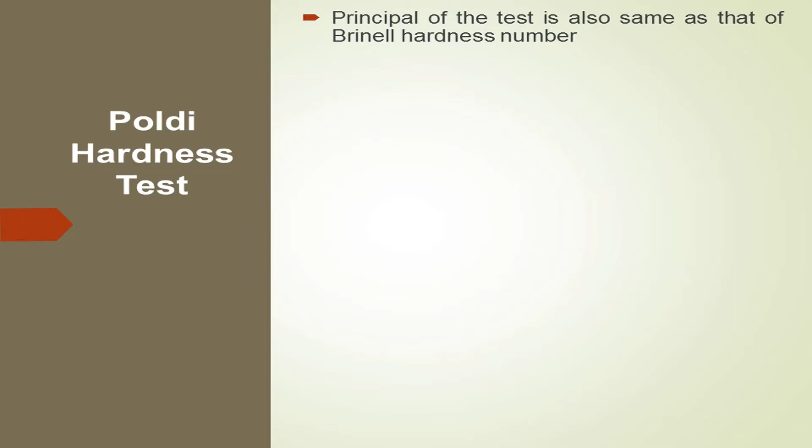The principle of the Poldi hardness test is also same as that of the Brinell hardness number. The Poldi hardness tester is a very small size and portable unit. A hardened steel ball indenter of 10 mm diameter is situated at the bottom, and a striking head at the other end. A standard bar is inserted in a slot provided in the instrument, in touch with the ball indenter. Hardness is known for that bar and is embossed on that bar.

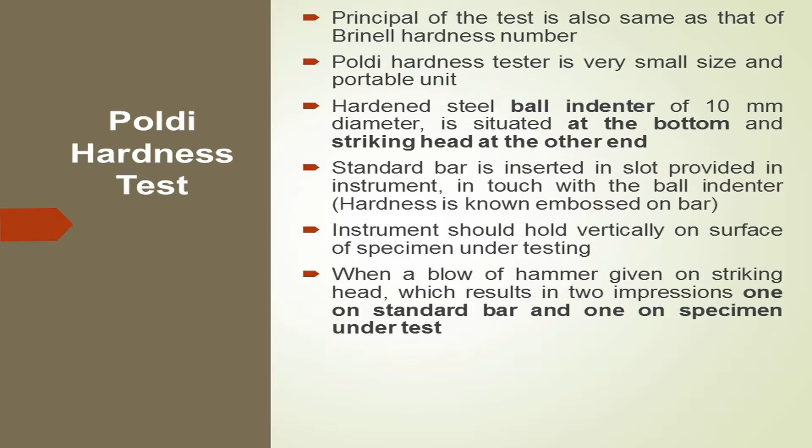The instrument should be held vertically on the surface of the specimen under testing. Then a blow of a hammer is given on the striking head, which results in two impressions, one on the standard bar and one on the specimen under test. The diameter of the impression is measured with the help of a low magnifying glass.

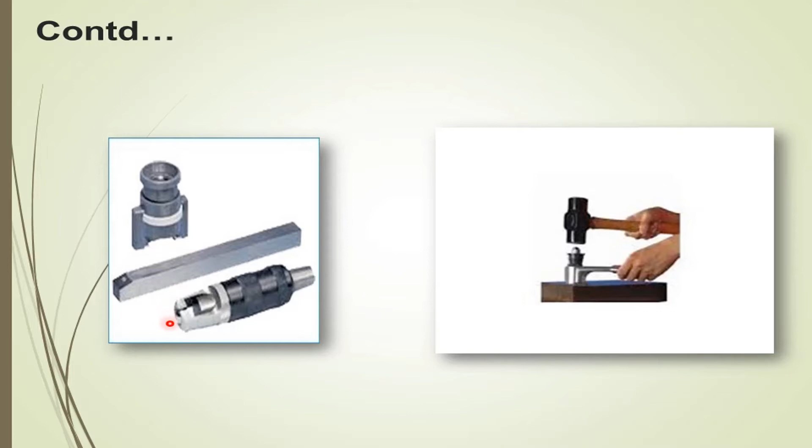So what we have to do basically is insert the standard bar in this slot, and the specimen whose hardness we want to measure is placed under this ball, so that when the blow of the hammer is given, we get two impressions, one on the standard bar and another on the specimen. After that, we have to measure both impressions.

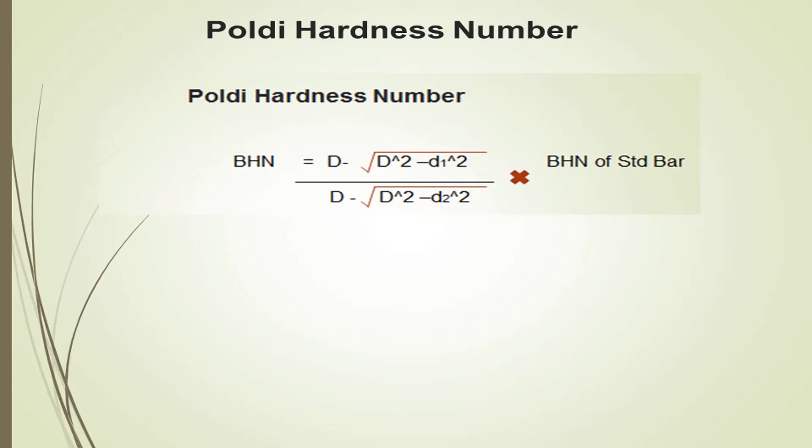For that, capital D is the diameter of the steel ball indenter, which we already know is 10 mm. D1 is the diameter of the impression on the standard bar that we have to measure, and D2 is the diameter of the impression on the specimen under test.

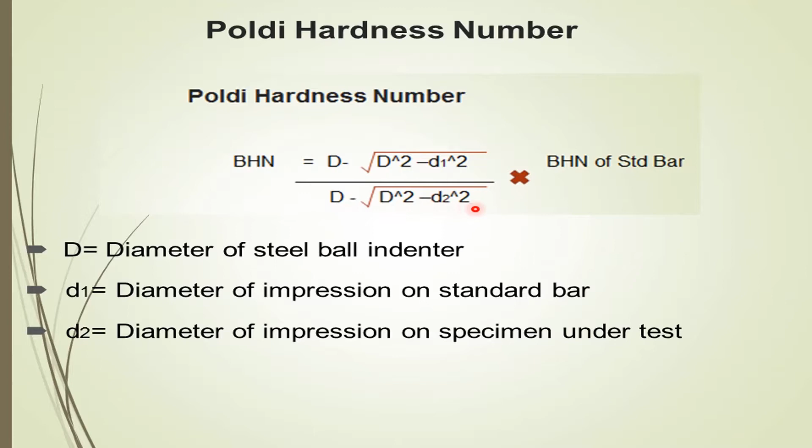According to this formula, BHN equals capital D minus under-root of D square minus D1 square, divided by capital D minus under-root of D square minus D2 square, into the BHN of the standard bar.

So we will see the calculation part. Before going to the calculation part, first we will see the advantages of the Poldi hardness test.

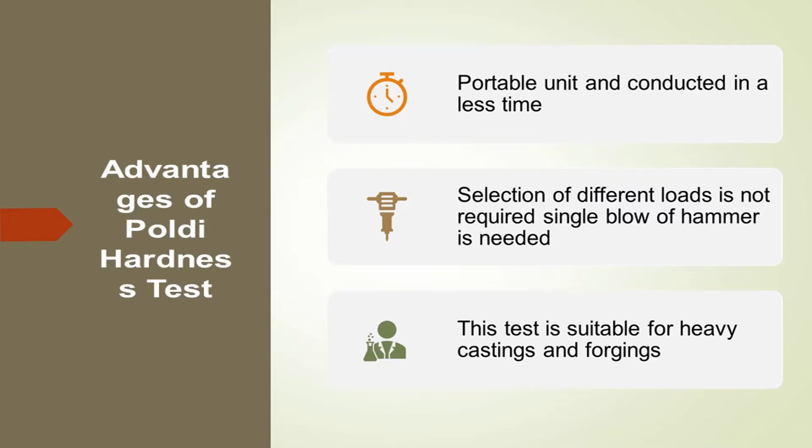This is a portable unit and is conducted in less time. Selection of different loads is not required. A single blow of hammer is needed. This test is suited for heavy casting and forging components.

There are some disadvantages of the Poldi hardness test. The first disadvantage is that the intensity of the blow of the hammer should be proper. Otherwise, if the intensity is too heavy, it will deform the ball indenter, and if too light, the impression will be too small.

The second disadvantage is that it is not as accurate as the Brinell hardness number. The Poldi hardness test gives us the Brinell hardness number, but it is not as accurate compared to the actual Brinell hardness test.

The third disadvantage is that the standard bar needs to be changed as it gets consumed due to the number of impressions on it. So we will now see the demonstration of the Poldi hardness test. Professor Zadu will explain the demonstration, then we will see the calculation part.

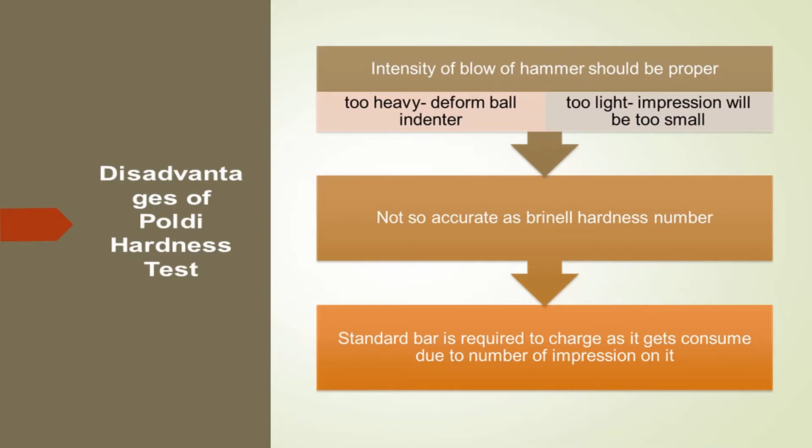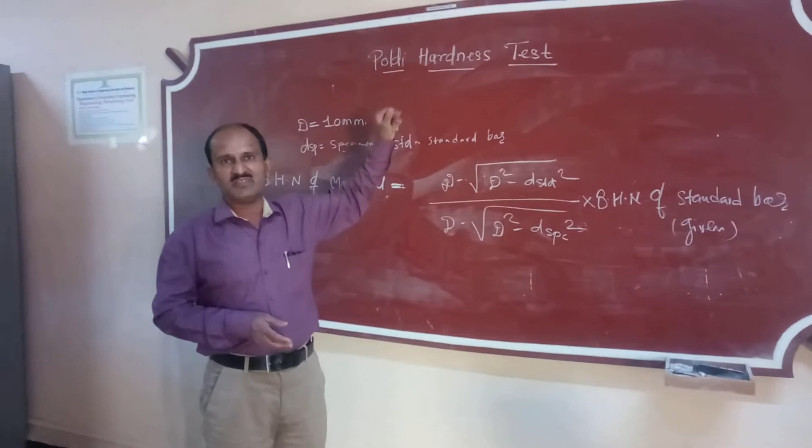Now today we are going to study the Poldi hardness test. Poldi is the name of the scientist or technologist who invented this test, called the Poldi hardness test. This test is recommended to find out the Brinell hardness number of a material.

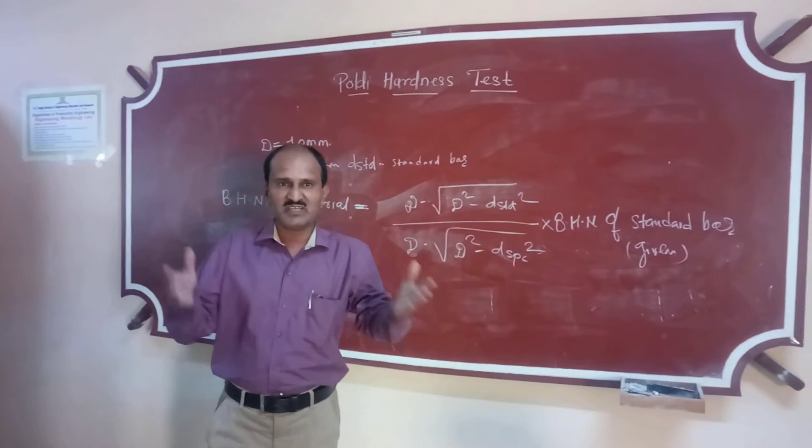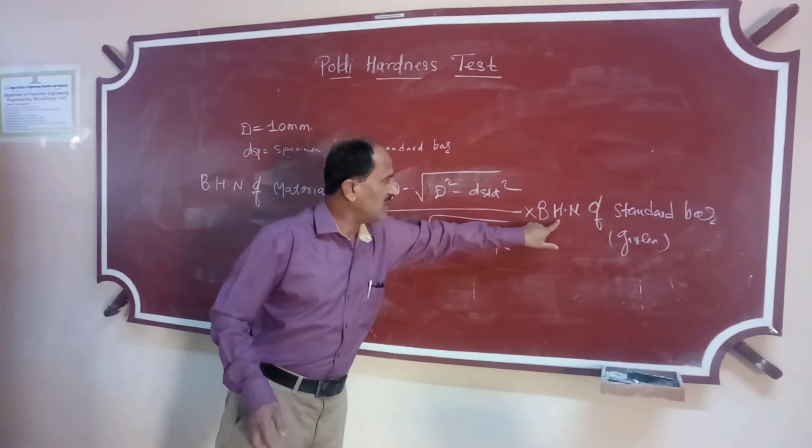As you know, there are notations for hardness number such as BHN, VHN, HRC, HRB. In today's test we will get the BHN of the material, that is the Brinell hardness number, found out using the Poldi instrument.

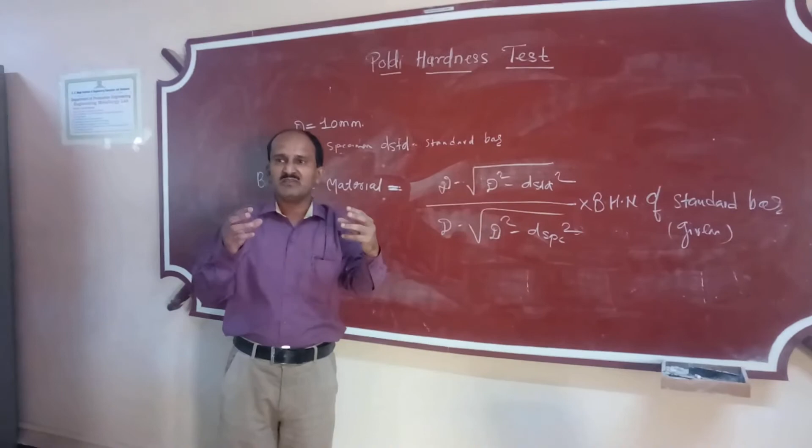The Poldi instrument is very simple in construction. This is the capillary tube with the plunger, and this is the lock for that. The ball indenter for penetration purpose is 10 mm, given as capital D in the formula.

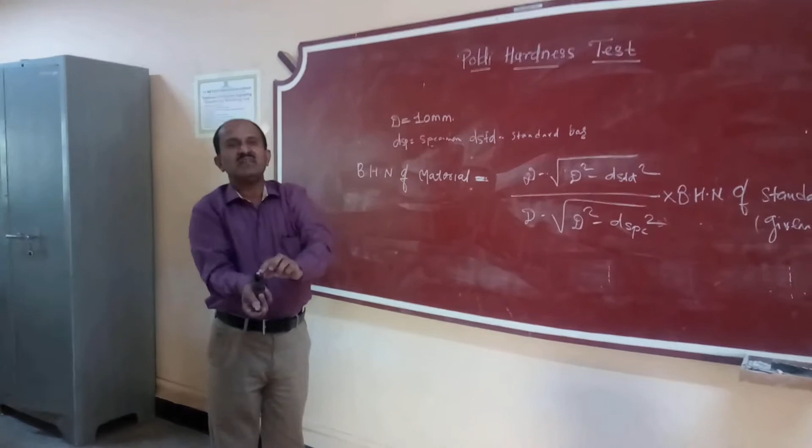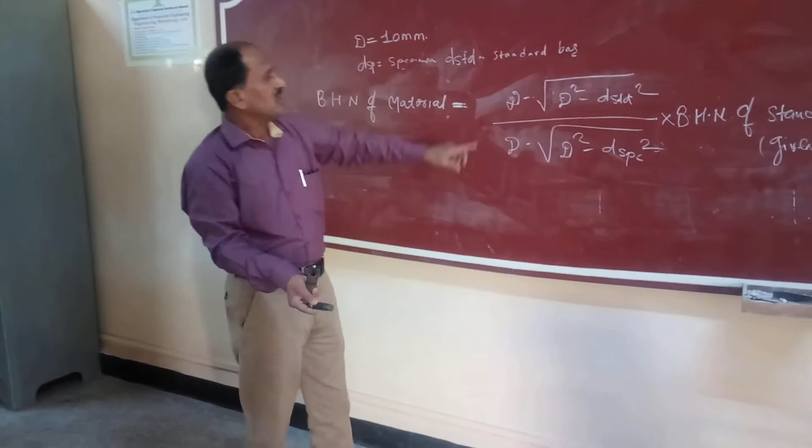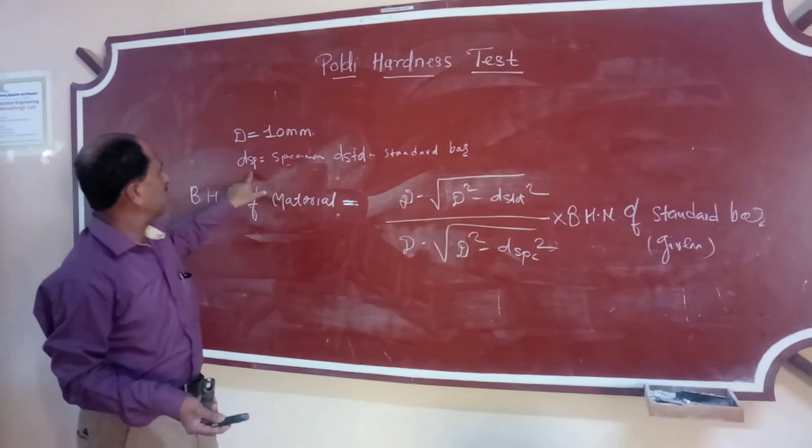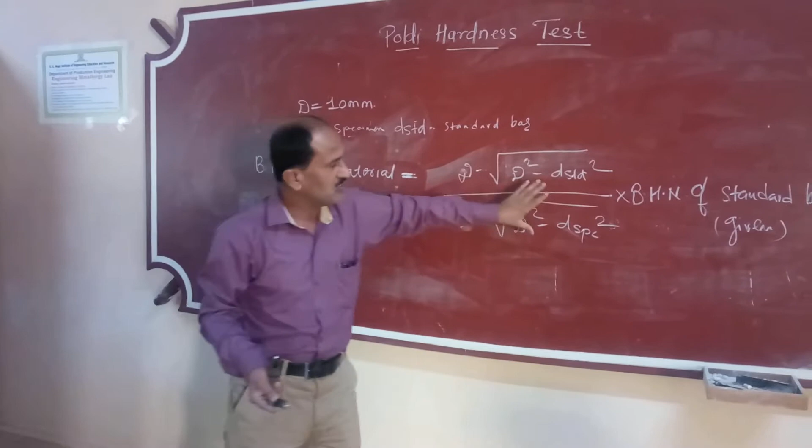We know the formula. Capital D is the diameter of the steel ball indenter. D standard is the indentation on the standard bar after penetration, and D specimen is the indentation on the specimen. I will explain these later. These two values we get after penetration on the material from the circular impression, and by measuring those dimensions and putting the values into this formula, we directly get the BHN number of that material.

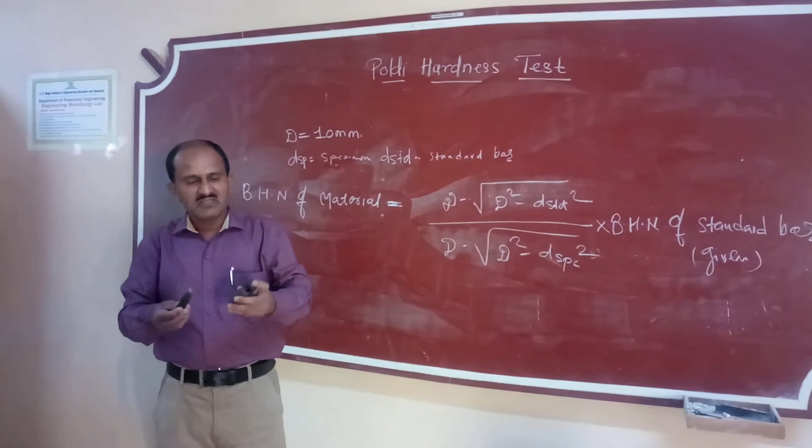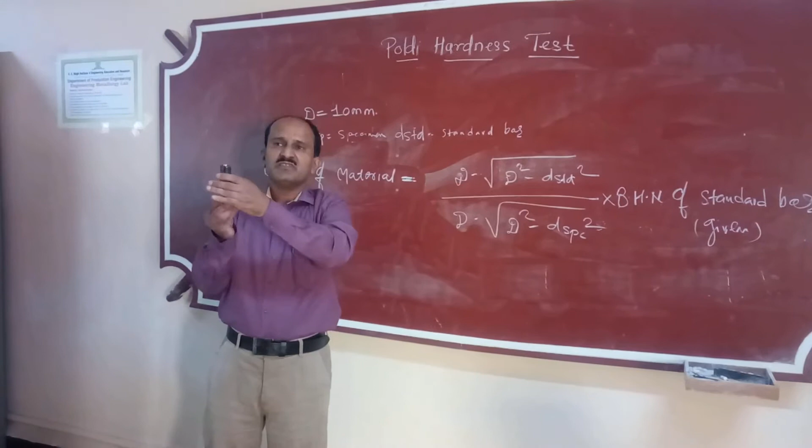It's a very simple test, and the advantage of this test is that the instrument is portable, so you can find the hardness number anywhere, at any junction. If the component is very huge in size and cannot be placed on the anvil of a machine, this simple instrument is recommended for the test.

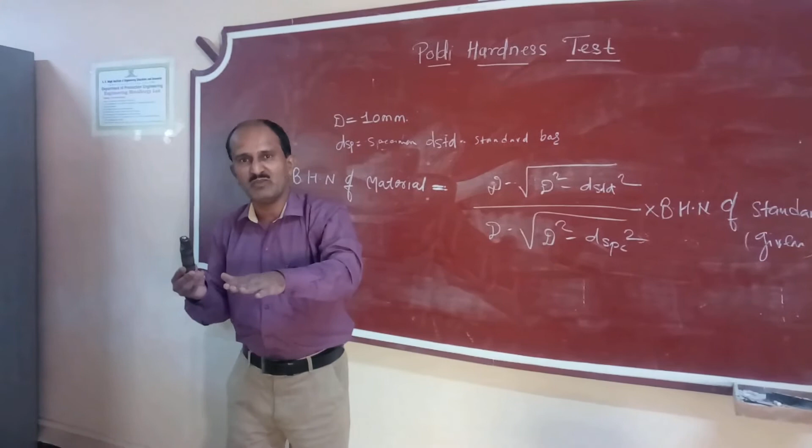Electricity is not required for this test. Only a skilled operator is required, since the intensity of the blow given on the material is very important. This test includes finding the BHN number for materials like brass, aluminium, cast iron, and steel.

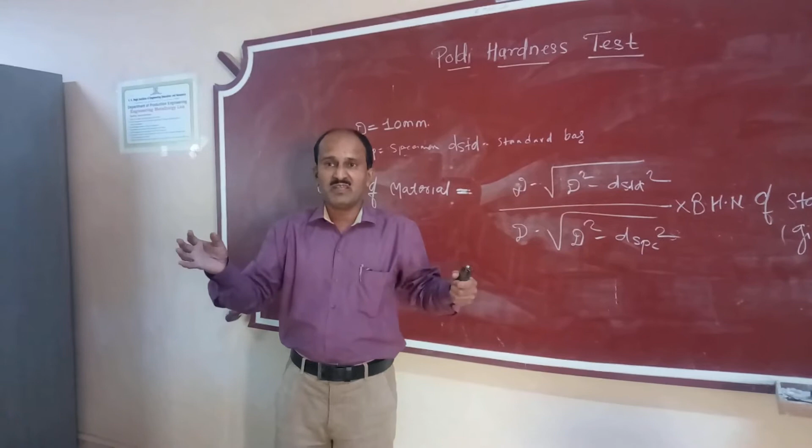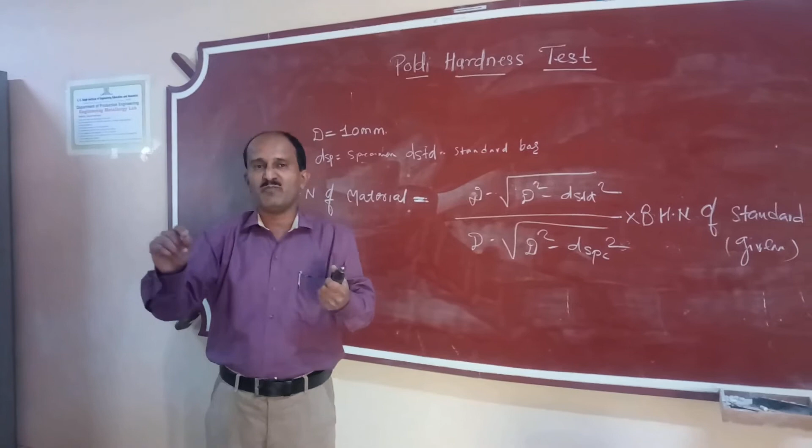Hardened steel material cannot be checked through this test because the hardness number of that material is very high as compared to this ball indenter. So this test is recommended for medium hard and soft material. So how to perform this test?

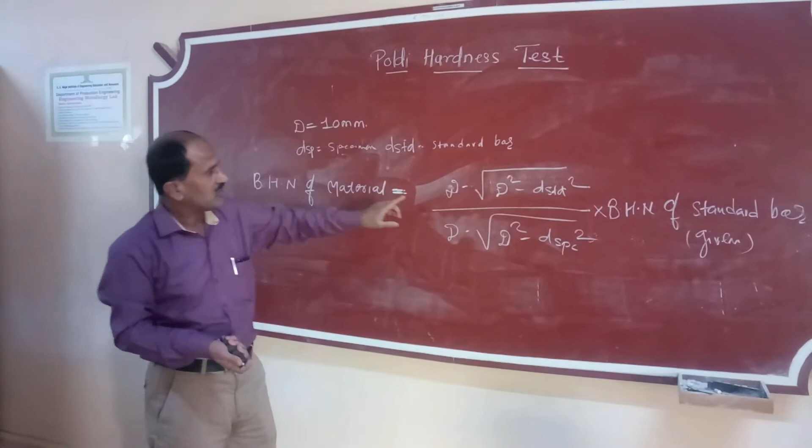We know the formula, we know capital D, it is given. D standard after penetration we will get, D specimen after penetration we will get, so this value we will get after performing this test. But BHN of the standard bar, this value is given. We have to check the number with respect to this standard bar.

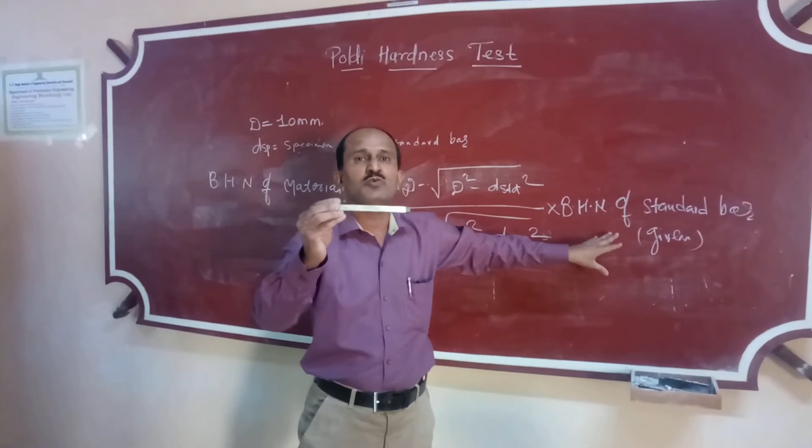So this is steel material, medium carbon steel material, and this is the standard bar which has hardness number 205 BHN. So with respect to all this, we can check aluminum, brass, copper, steel, cast iron material. So this is very important.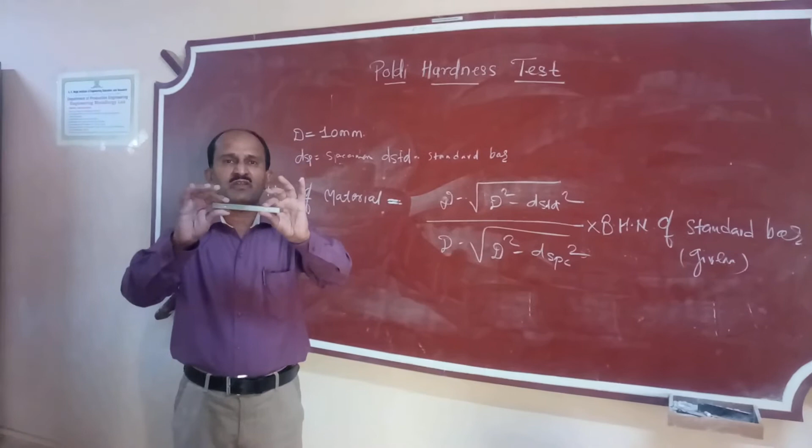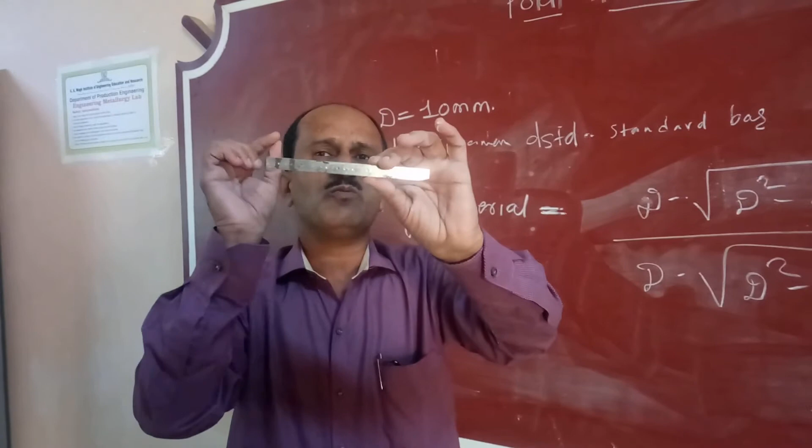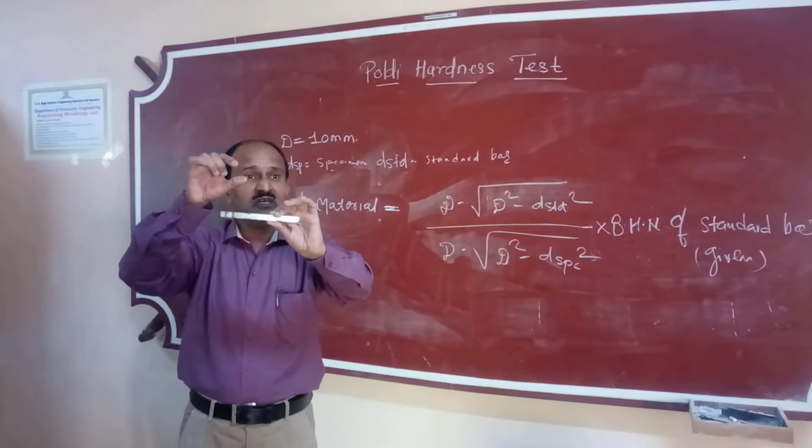After giving the blow on the material, you will get one impression. You will observe this small impression on this standard bar, a very circular small impression. That impression forms after giving the blow on the material; simultaneously it will appear on the standard bar. So we have to observe this circular impression through this magnifying scope.

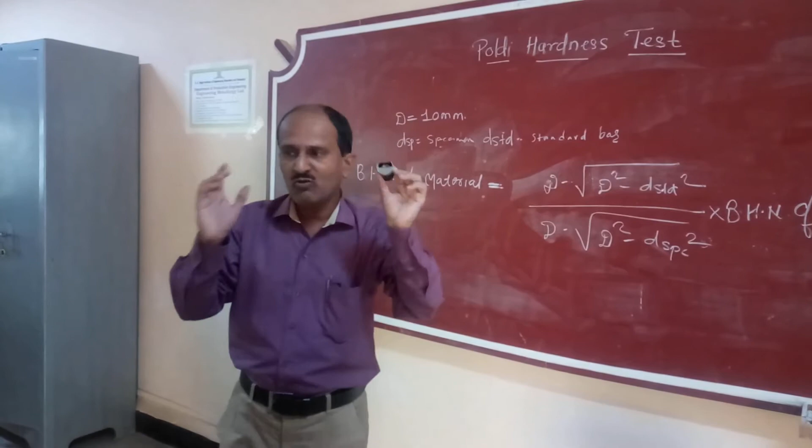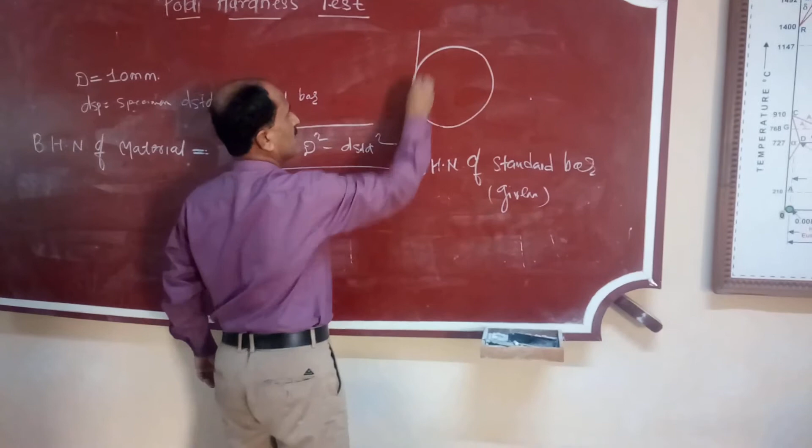See, this is the magnifying scope. With the help of this magnificoscope, we are able to find out the diameter of the indentation or impression. So how do we find this out? On that magnifying scope screen, this type of scale is provided.

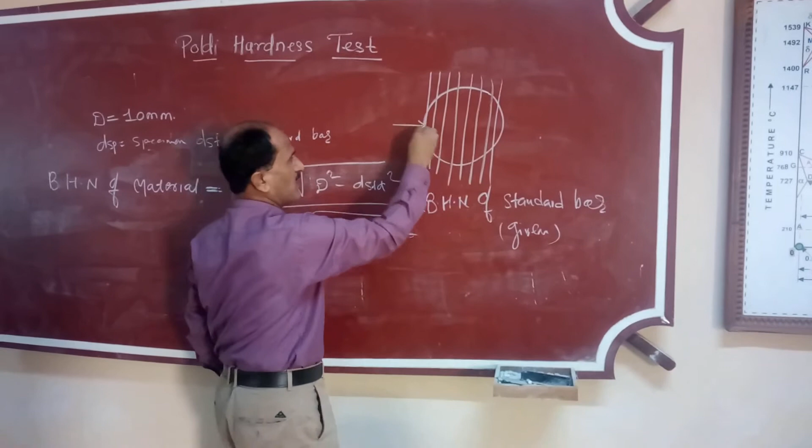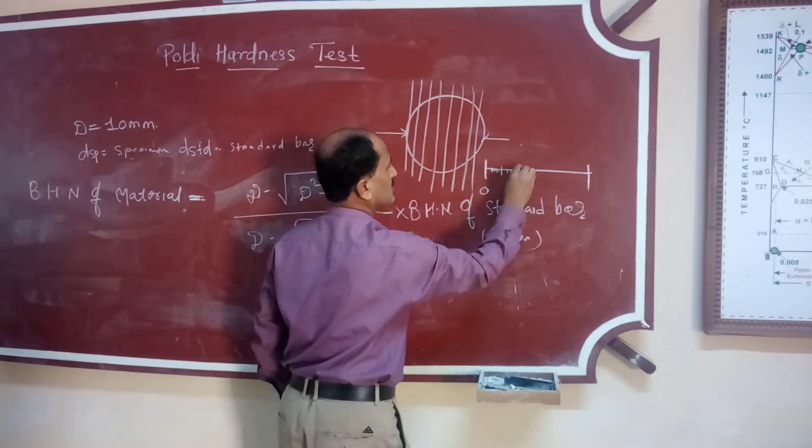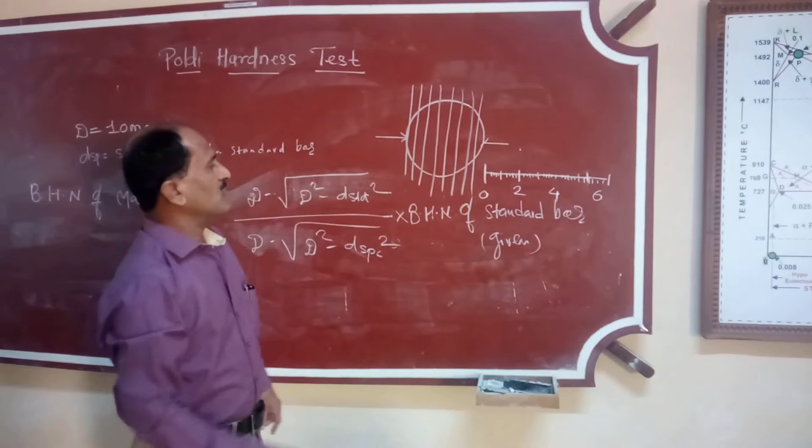The scale will be like this: 0, 2, 4, 6, like this. This value is not displayed on screen, but this is 1, this is 3, this is 5. We have to take care of this scale.

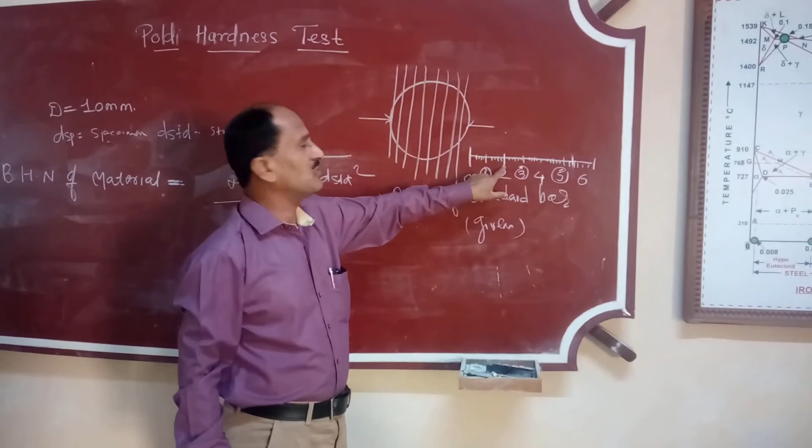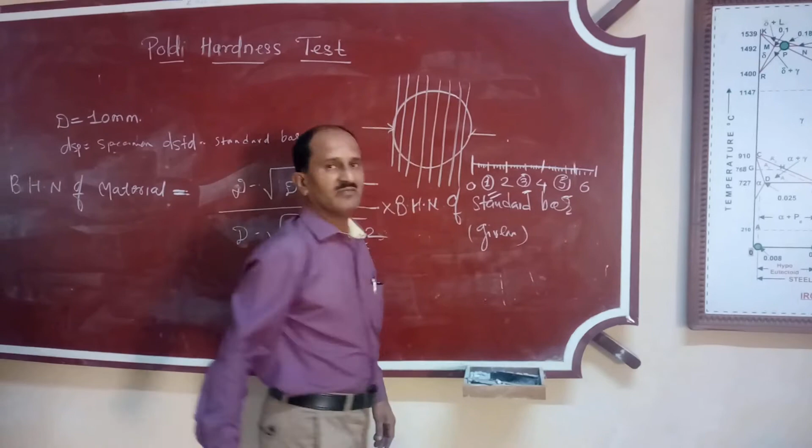So after 0 we directly get 2, after 2 we directly get 4, and after 4 directly 6. But on this scale we have to consider 1, 3, 5 like this. So how to measure this distance, that is very important. For this test, a skilled operator is required. So how to measure?

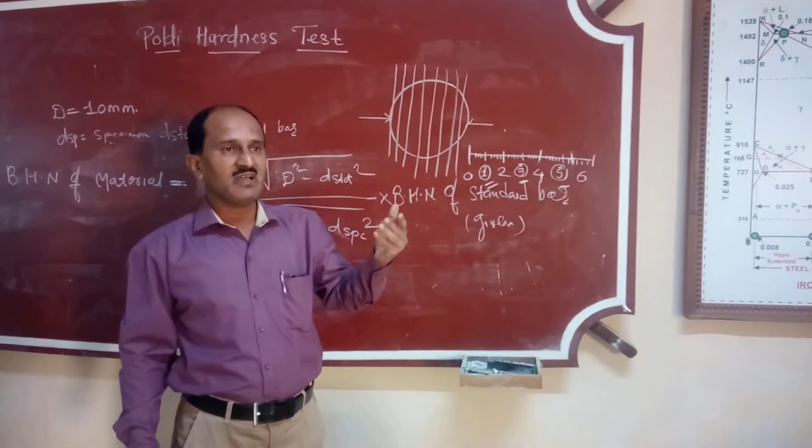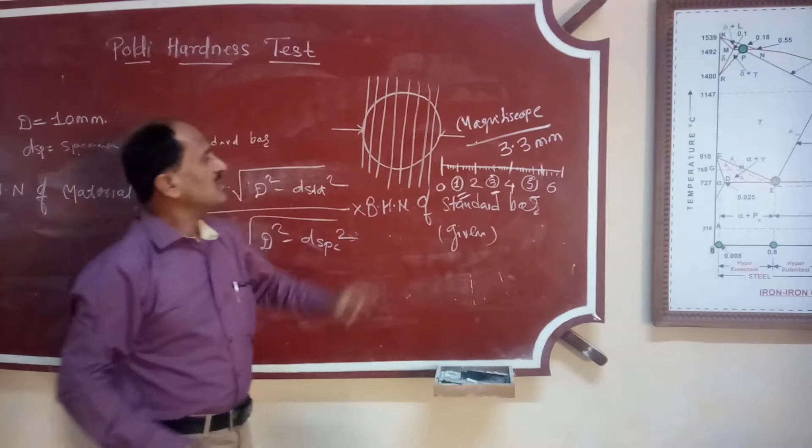We have to magnify the image. So this is the magniscope. It will enlarge this impression and we will get the impression on it. For example, we are getting 3.3 mm distance on this scale. So how will it come? If we have to measure this diameter, we have to set the zero at this junction.

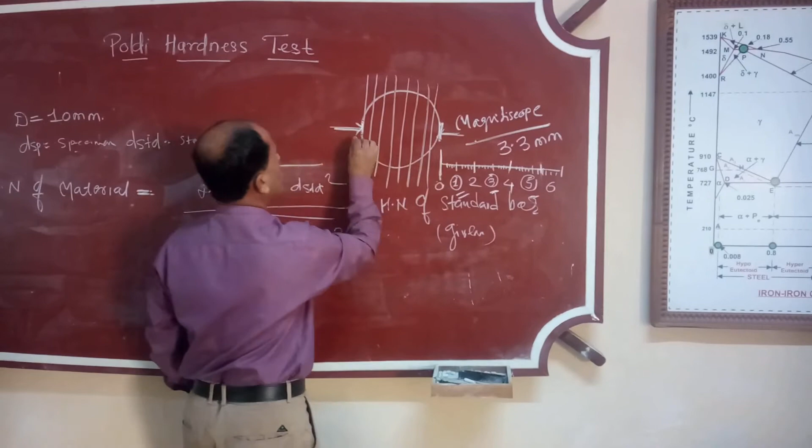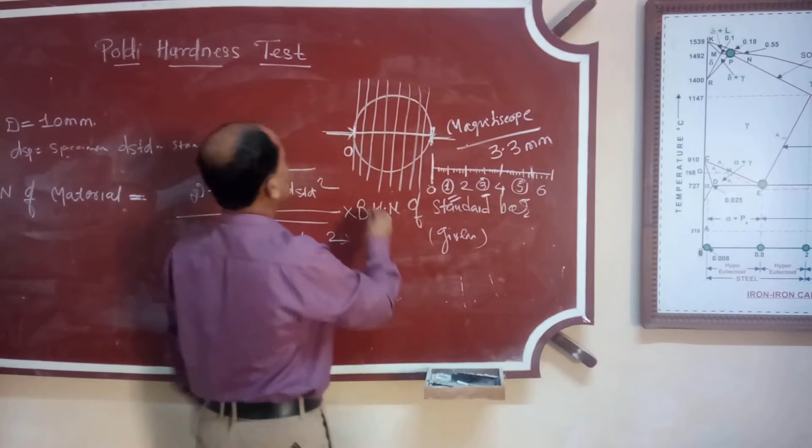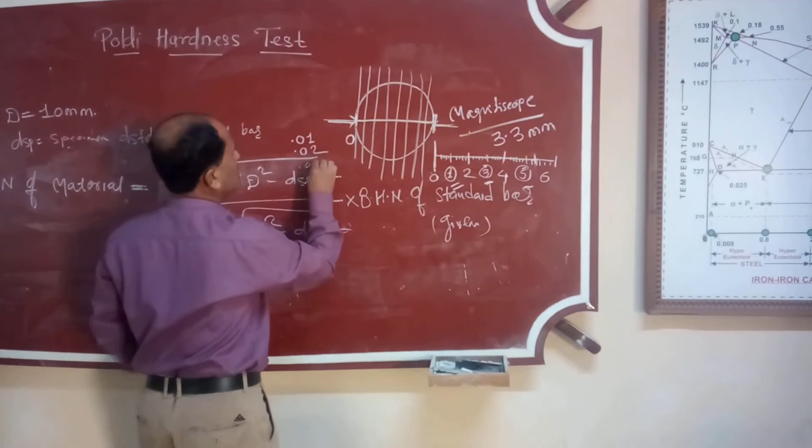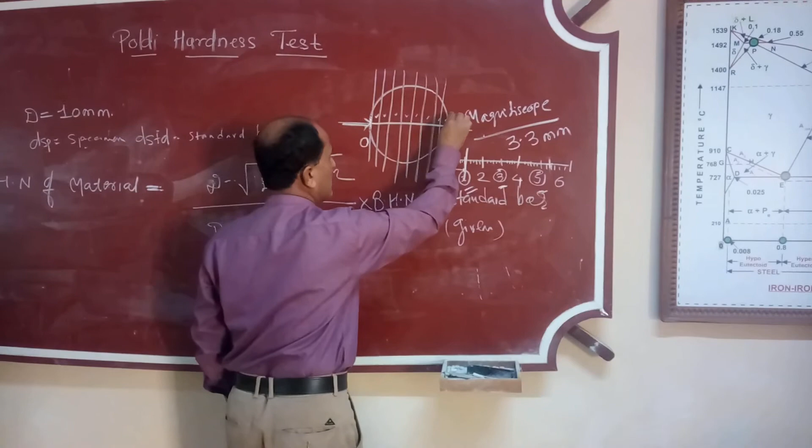Adjust in such a way to see how much distance is occupied by that division. So the distance between two lines, that is very important. Like here .01, .02, .03 like this. 10 divisions, that is 1 mm. When this is complete, these are 10 divisions, 1 2 3 4 5 6 7 8 9 10, it came up to here, so it means that is 1 mm.

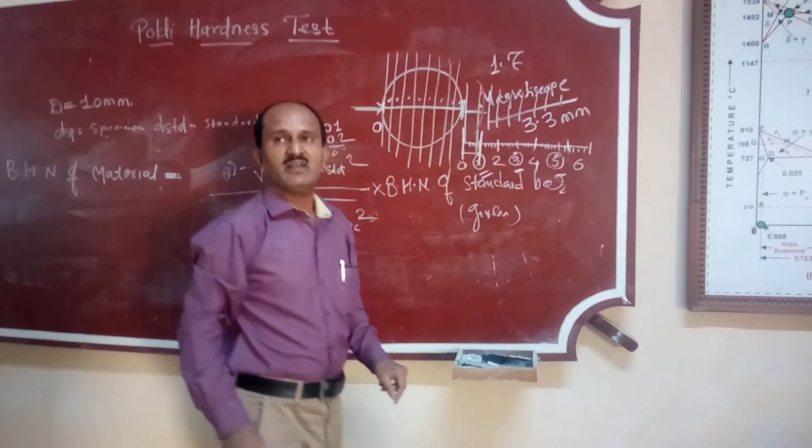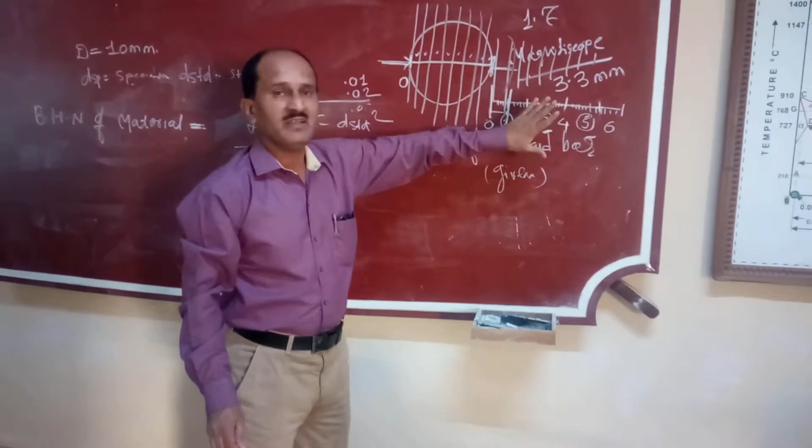It tells that if the distance is 1.7, then after that 1 2 3 4 5 6 7 will be added. So that is very important. Without this, we cannot achieve the reading. So this is a very important factor.

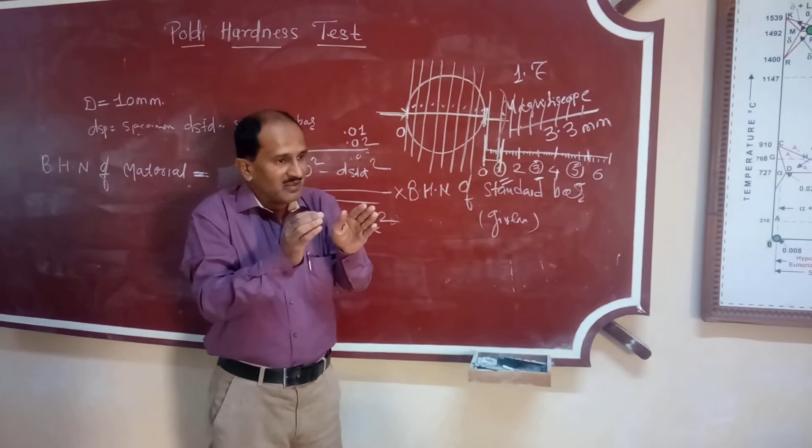As for the measurement, if the measurement differs from the correct reading, it means that the value will not be correct. So we have to adjust the scale along with this impression, that is very important. So the scale is very important. We have to magnify the scale with respect to the diameter portion of that material. Then we are able to find out the correct reading.

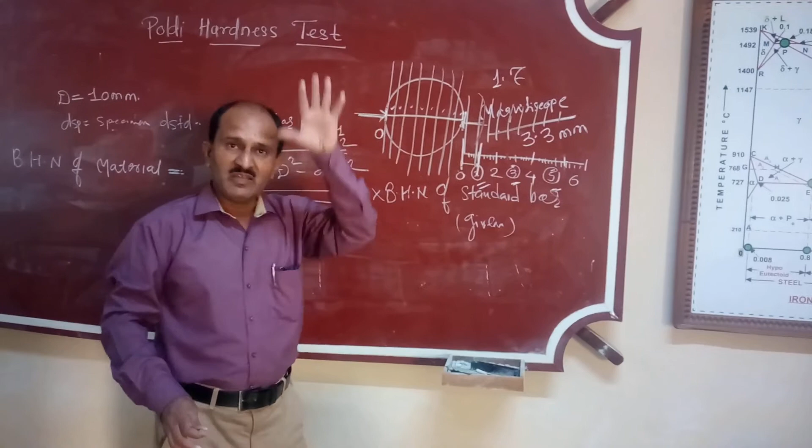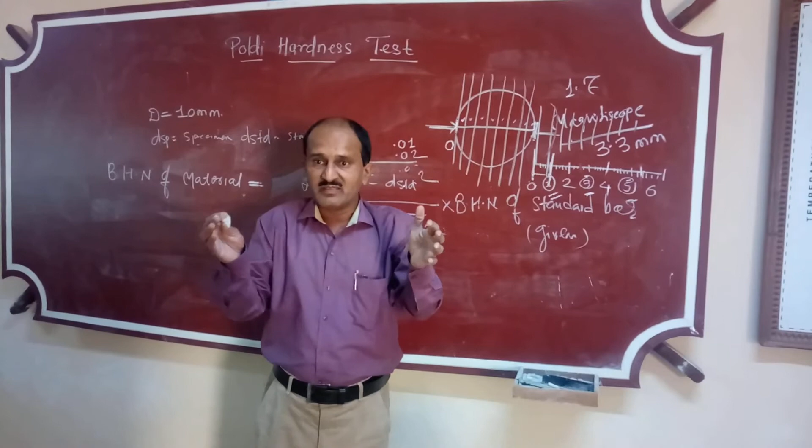In practical, I will show you some readings, how to perform this test, how to measure. But the limitation of this video is that we cannot magnify that image through the eyepiece on your mobile screen. So that is the limitation. So we have to magnify. How to magnify? Perpendicular to that screen, that material.

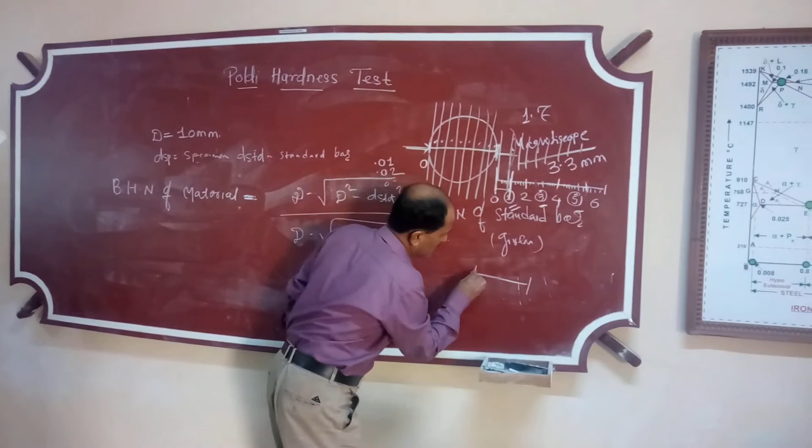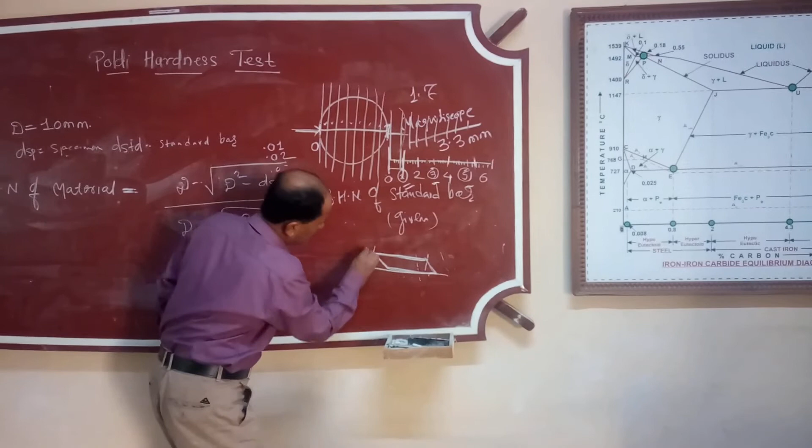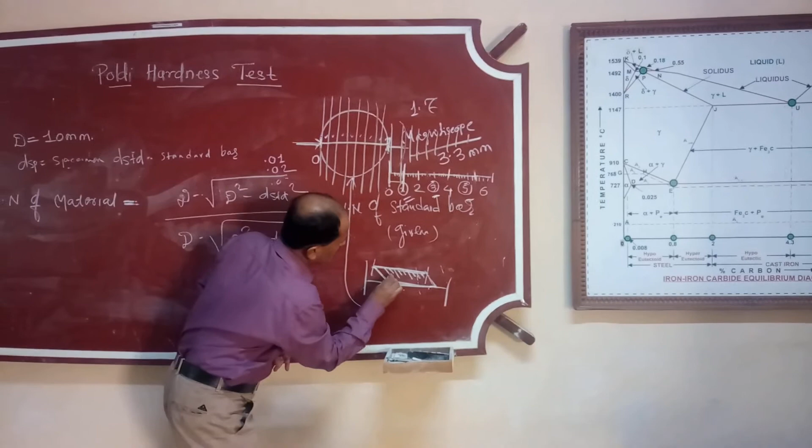So we will get a screen like this, and we have to adjust this plate in such a way that it will coincide with the diameter portion of that material. So it should come here. We have to adjust the scale in such a way, this is very important. Here came 0, here came 2, here came 4.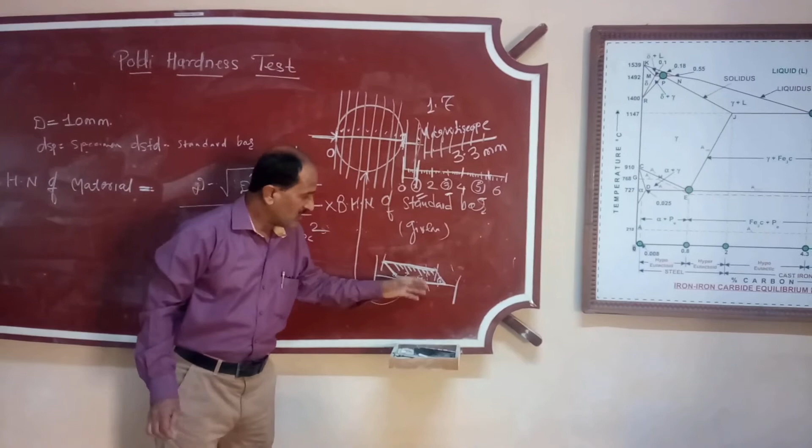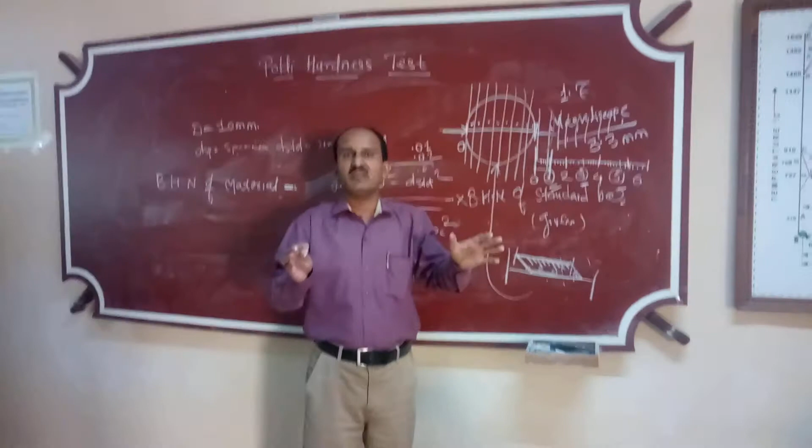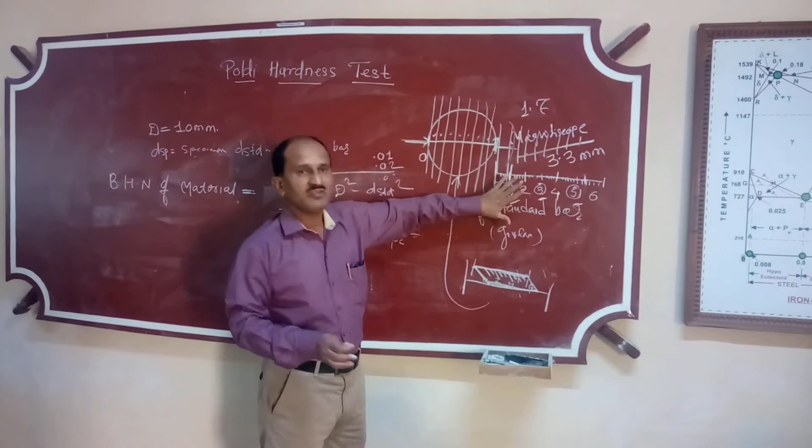We will get knowledge and expertise after actually performing this test. That is very important. Only after actually performing will you be able to find out the correct reading. But my purpose is to inform you that this procedure is very important. If any error occurs in the measurement on this scale, it will differ from the correct reading and our test will totally fail. This test requires a skilled operator. So we will perform this test. See, we have some material.

See, we are having so many materials. We are having aluminium, copper, brass, mild steel, like this. So, if we have to find out the hardness number of aluminium, we have to find out the hardness number of copper, we have to find out the hardness number of brass and mild steel. What precaution is to be taken?

First, specimen preparation is very important. Why? Without specimen preparation, we cannot be able to read the indentation on that material.

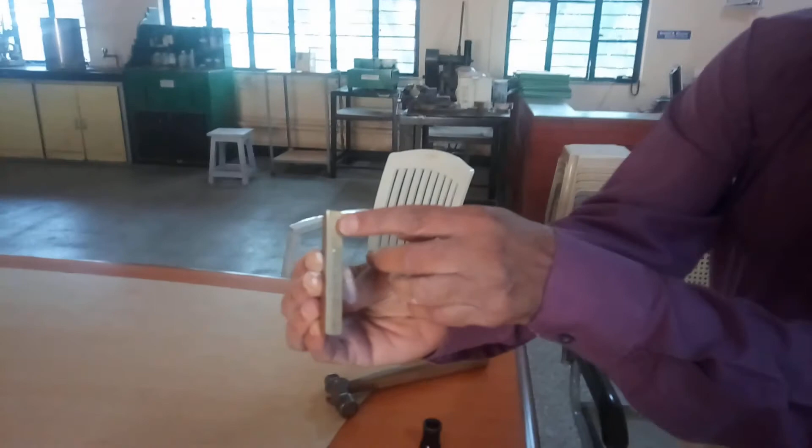For that purpose, preparation is necessary. How to prepare this specimen? So take this specimen on this polished paper, and we have to just polish in such a way, like this. Then I think you are able to find this mirror image, half mirror image. Then tilt this specimen in such a way that again the remaining portion will be polished, like this. So I think you are getting both side polishing.

We are able to then find out the correct reading or mirror image. Mirror image is very important. Without this image, we cannot find out the correct reading. In this case, specimen preparation is necessary.

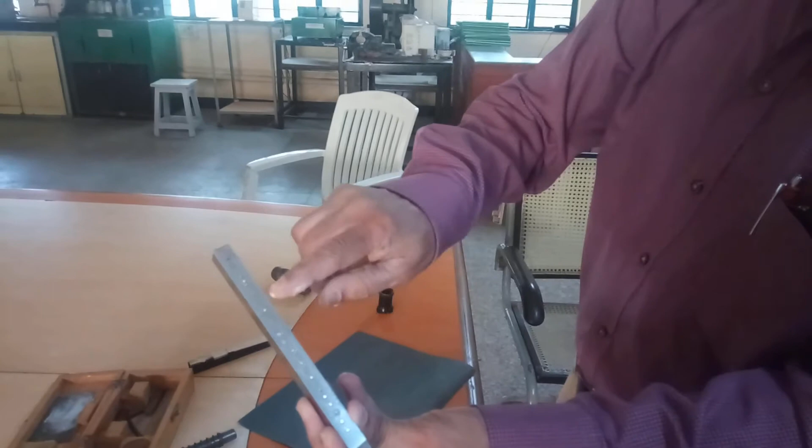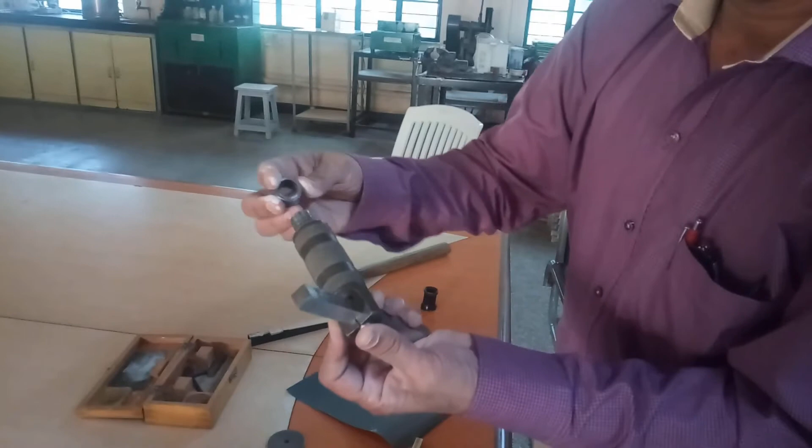Reading we have to take with respect to standard bar. See, this is standard bar. We are having some previous number of reading, but we have to adjust in such a way that we will get correct reading. So we will insert this. See, this is ball indenter, and we have to insert like this. So this is the plunger, and we have to feed this. Like this.

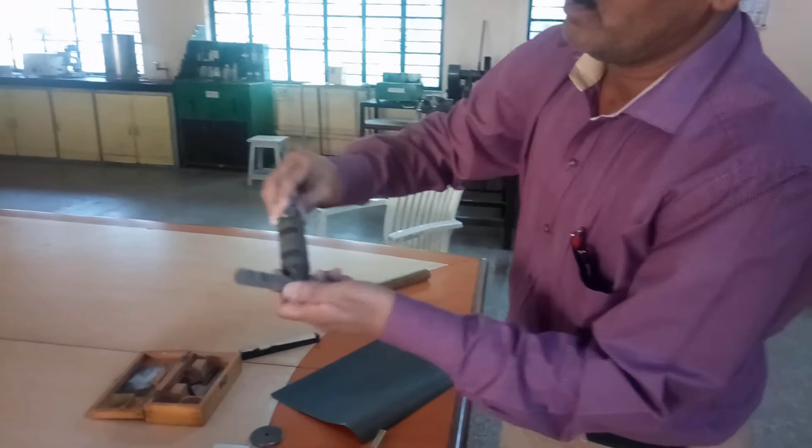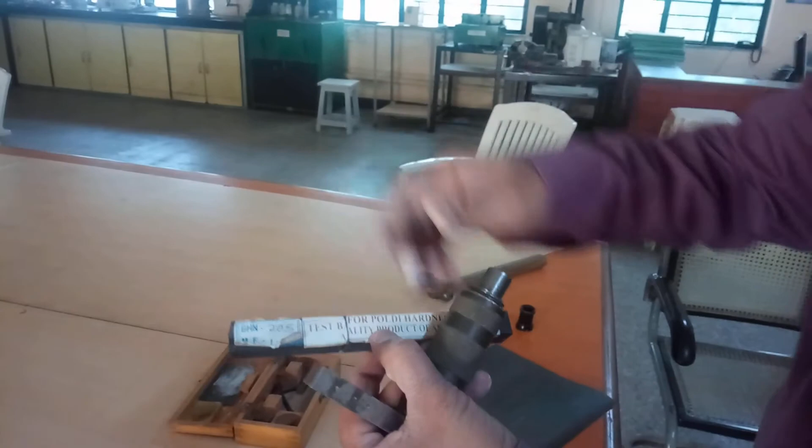And we have to fix this standard bar, which is having BHN number 205. It is already given. 205 is the BHN of this standard bar. So we have to fix this in such a way, and this is the specimen. We have to penetrate on this material and give the blow. So we will take care of this, and this is the blow hammer.

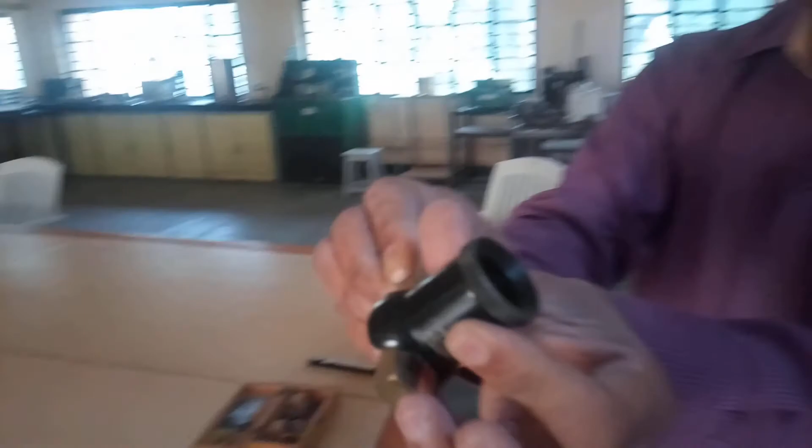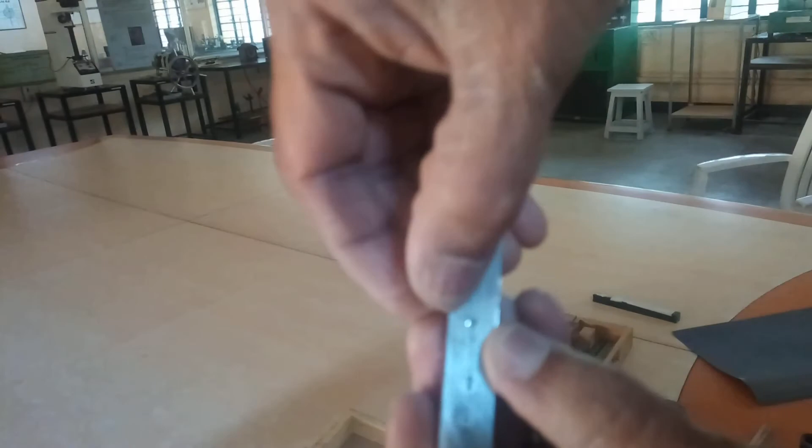Simultaneously another impression on standard bar. We are getting two impressions, d standard and d specimen. See, this is the impression. This is the impression.

We already covered the demonstration of the Poldi hardness test. Professor Jadhav already explained the step-by-step procedure of this Poldi hardness test. Now, due to some limitation of this video, we cannot show you how to measure that impression, but I am going to explain here. We know that diameter of the ball indenter is 10 mm.

BHN formula we already know: it is equal to D minus root of D square minus d standard square, divided by D minus root of D square minus d specimen square, into BHN of the standard bar. Now BHN of the standard bar is given, that is 205, and small d standard and small d specimen we have to measure through this impression. Now how we are going to measure?

You will get the circular impression, then put the magnifying glass so that its edge is matched properly, tangent to this circular impression. So suppose these two lines are there, then it will indicate 2 mm. Suppose first, second and third, then it will indicate 0, 2 and 4, and the middle of the line indicates the 1 mm distance.

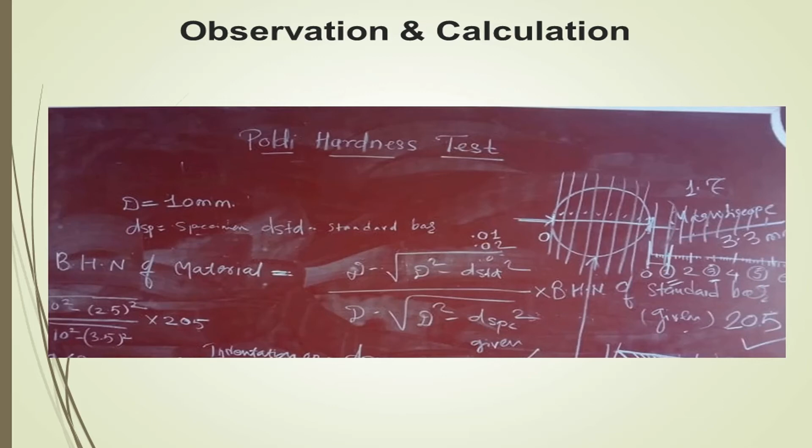So after measuring, we got the diameter on the standard bar is 2.5 and diameter on the specimen bar is 3.5. 10 is the diameter of the ball indenter. After putting all the values and BHN of the standard bar, you will get the reading 103.52. So the BHN of the specimen bar is 103.52 as compared to the standard bar, 205, and we selected the standard bar as medium carbon steel and specimen bar of brass.

So obviously the Brinell hardness number of the specimen bar is less than the standard bar as the material is soft. So this is all about the Poldi hardness test, which gives you the Brinell hardness number of any component, which is a portable unit, and very simple to measure the hardness number with the help of the Poldi hardness test kit.